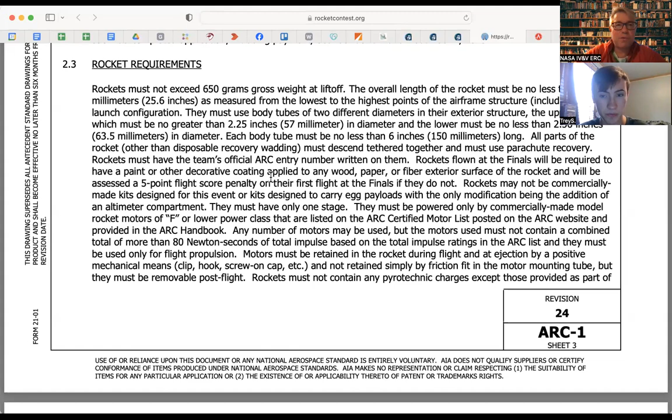So I want to begin by sharing some web pages that I've been looking at that I think are going to be helpful for the team. Can you see the page? Yeah. Okay, so always begin all of your work by writing down the requirements. So this is this year's rules for 2024. And if you scroll down, what you'll see pretty quickly after safety and how to form teams is this part right here on rocket requirements.

And so these are things that we would definitely highlight here. So we can't weigh more than 650 grams. If you're pushing that, then you're also pushing the limits of an F engine to get up to 800 feet. Okay. But this is really key here. This will affect your design. Your rocket must be no less than 650 millimeters from the lowest to highest points.

Okay. This is the next part that's really key that affects this year's challenge, and that's different each year. You have to use two body tubes with different diameters in their exterior structure. The upper must be no greater than 2.25 or 57, and the lower one must be no less than 2.5 or 63. It just so happens that these two dimensions line up very nicely with standard parts that are available from any

rocket supply company. The smaller or upper section, which we will call our payload bay in the future, is essentially a BT-70. That doesn't even refer to the diameter or anything. It's a commercially accepted name for a body tube that's 56 millimeters in diameter. And the no less than 2.5 or 63 lines up very nicely with the 65 millimeter diameter BT-80 body tube. So from now on, we're going to refer to BT-70 as our smaller diameter body tube, which will meet the requirements, and a BT-80 as the one for our booster, which will be the bottom part of our rocket.

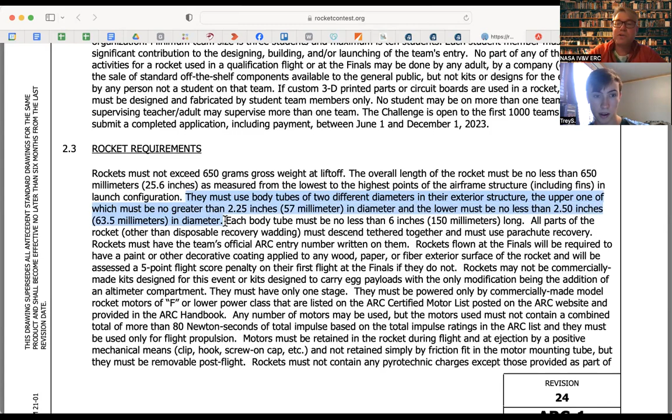Each body tube must be no less than 6 inches. So that's another thing that's going to affect us. You can't have a tiny little payload section. So you have to have at least 6 inches there. But if you have a 25-inch rocket, then that shouldn't be an issue. Just keep that in mind.

When it comes back down, all parts must come together. Now, this is one of the areas where they change it each year. Sometimes they come down as two separate pieces, which would necessitate two parachutes. This year we can have one parachute, and our booster and payload are connected together by a shock cord. There's some other details about what you're going to use here, and decorations and stuff.

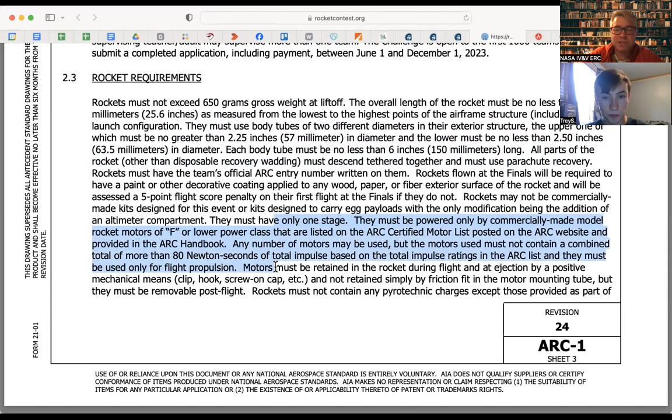And you have to use an F or lower class engine. So when you cross into G's, some G engines require a level 1 certificate, and so you have to basically stick with Fs, which is easy to do. In fact, more likely you're going to have a problem going too high, and you have to slow it down. You do have to use commercially available rocket engines, which is super easy because those are the ones that will be available for us to just purchase.

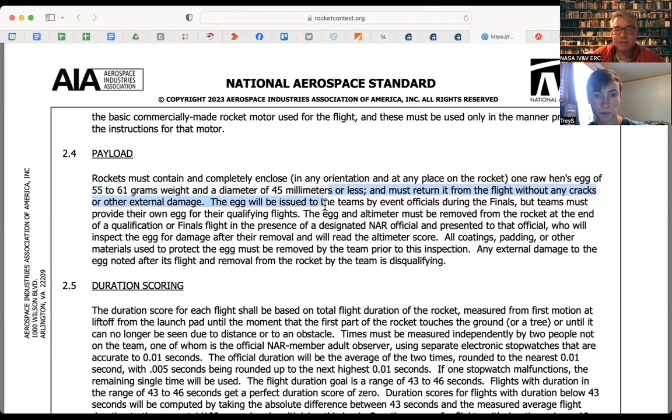So with the payload area, we're going to carry 1 egg. We've had as many as 3 eggs in the past. It says 55 to 61 grams. I usually just stick with 60. And I figure if I end up with a lighter egg, I'm going to pack it with clay anyhow. So I always have 60. So shoot for 60 and pack some clay with you. So if you need to boost it up, that gives you that consistent weight load in your payload area. Okay. And as far as diameter, you don't have a whole lot of control over that.

Duration scoring. So this is all the pretty standard stuff, but essentially you're trying to shoot up to 800 feet. So this will tell us in here where our altitude is, right? Let's see. Stopwatches. Flight duration. 43 to 46 seconds. So that's going to be key. And again, this will come into play when we look at the simulations.

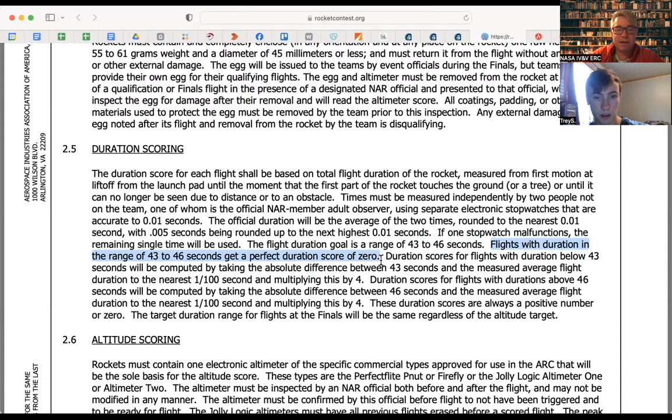Here's altitude scoring down below, and I think we're shooting for 820 feet. Is that right? Qualification 820. So we'll probably jump back to this document in a little bit to talk about the rocket, but suffice to say we need BT-70, BT-80s, and F engines. So I'm going to jump. What happens if you get under 820? You get a point added to your score for every foot you are above or below 820.

Okay. So I am not advocating this is the only place to buy parts, but I will tell you that Apogee Rockets does a fantastic job of detailing the exact dimensions of every product they sell. This is very helpful for simulation purposes. So here is a 56 millimeter TARC foam nose cone.

You are not going to gain, according to laws of physics, you're not going to actually soften the blow by using a foam nose cone than if you used, for example, a plastic polyethylene nose cone that would sort of stab into the earth. That actually dissipates force better than a foam one.

But practically speaking, these foam nose cones are pretty nice because they have an 18 millimeter hole already in them that you can stick a piece of tubing in and put your altimeter inside of it. So it's convenient if nothing else. And they're really cheap compared to other options. But we can also 3D print our nose cone. So here's a commercial nose cone, a PNC 56A BT-70.

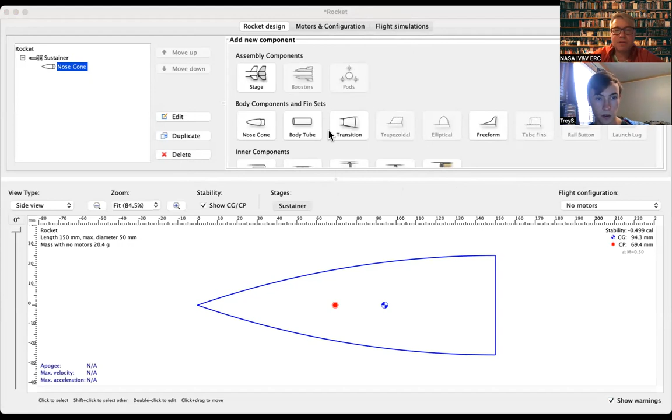I don't see that. Are you not seeing this window? Uh-uh. Oh, it pops up in a whole new window. All right. Well, thanks for letting me know that. Here's what I'm going to do. I'm going to share my whole screen, and hopefully it doesn't share our pictures of ourselves on top. So let me try again. Share entire screen. Desktop. There you go. So let me start over. Let me close that. Okay.

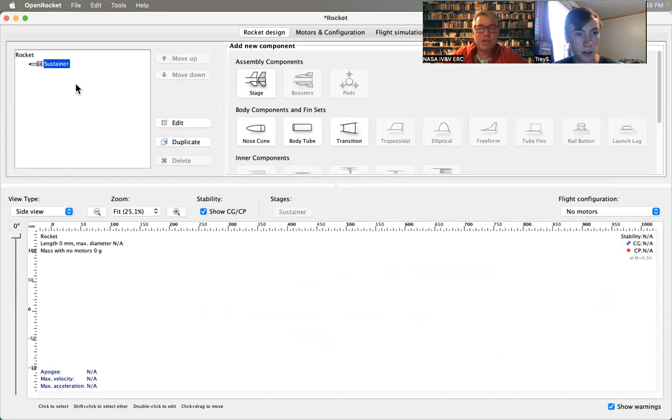So when I begin, I'm going to select a nose cone. So I'll just go in here and delete this part out for a second. We're only going to have one stage in this rocket, so don't worry about the stage button. And on this one stage, we're going to begin with a nose cone. And what I'm looking for, I can filter by typing 56 in here. And here's a LOC 2.56. And so we are looking for one that is a BT-70 size. The OPN.

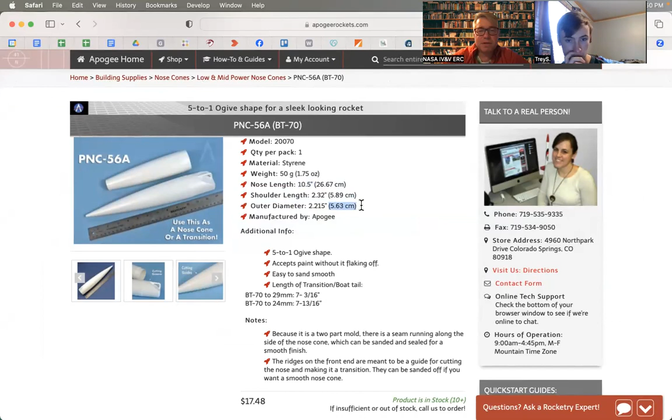I'm not sure this is the right size. 2.5, I think this is the one. Okay, and I can confirm this. I'm sharing my whole screen, so I can jump back real quick to the page I was looking at. So we are looking for one that should be 10.5 inches long. The outer diameter should be 56 millimeters. And so this one is 56. So I should be able to find the appropriate one in here.

The PNC, ogive. This looks like the right one for us. And this is 57 here. So these are some of the ones that I think we would buy. PNC 2.14, PNC. And so I can choose which one I want. So this one now, let's look at the measurements. It's 241 millimeters in length, and it has a 57 millimeter base diameter. And so 56, yeah, so this is basically the nose cone we were looking at, right?

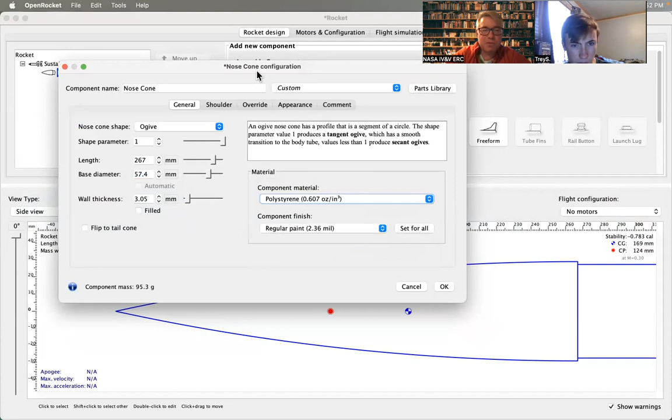And here, this is an important lesson to learn, which is what I'm doing right now, which is probably something you didn't see earlier: I'm going to ensure that when I add this nose cone to my rocket, it does match in weight and dimensions what I want. So if I go and make my own custom 3D designed one, I will do the same thing. I'll make sure that my simulation is matching what I designed. So the wall thickness is definitely not 3. I'd be surprised if it's even 1 millimeter thick.

But let's see how our mass is now. 95 grams, and it says it's going to be 50 grams. So we're still gonna drop a little bit. We're on 34 grams already. Okay, so 41, and there's another way to do this, which is there's a mass override. 48.9 grams. So if it was 1.5 millimeter wall thickness, then it would weigh in at the exact weight that it's supposed to. Right now we're unfinished, we did not paint it. Okay. And I believe this is what we call an ogive nose cone. That's the shape of it. And I think the length is correct now.

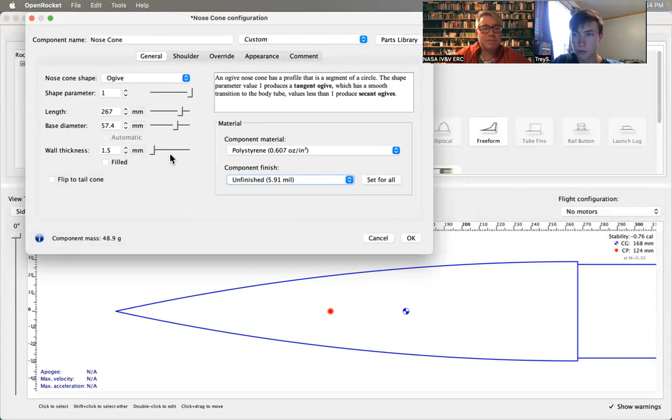It was 266.7, so 267 millimeters. The shoulder: the nose cone that you were designing didn't have a shoulder, and you need one. Otherwise, it can't slide into the body tube. So the diameter of the shoulder should be the interior diameter of the body tube. So what does that mean? Well, if we go to Apogee Rockets and we look at a BT-70 body tube, the inner diameter is 55.4. And this is 54. So that means this is smaller than the inner diameter, and that's fine. That's what they're saying the custom measurement is.

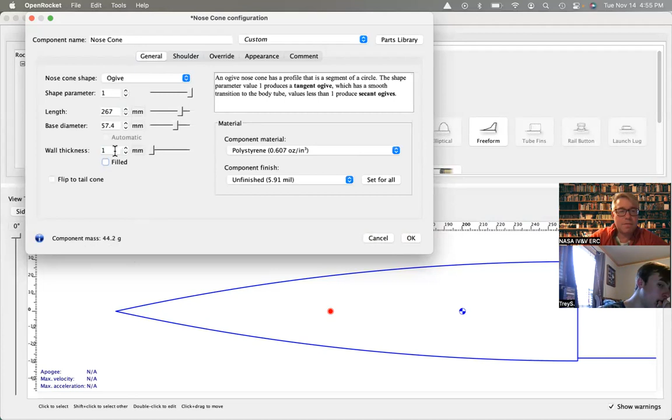And we could also look at the actual rocket nose cone that we're looking at, the shoulder length, the outer diameter. I'm not sure it shows me shoulder diameter, but it's going to slide into a BT-70 body tube. So this is weird. It says 0 thickness in the walls, and I'm going to say it's at least, we said 1.5 for the other one. Yeah. Okay. So now we've gained some mass here. I'm going to say it's all 1 millimeter. General. 44. So I think we're getting pretty close to what it is.

Okay, so it says 54 grams. So we're there. So this nose cone works. And we are hoping that this is the PNC 56A BT-70 nose cone. That's the one that we're hoping that we're buying, and we're going to use it here.

So I'm going to go ahead and rename the part. And we have it. So if you see, we now have the beginnings of our rocket. Over here in the list of parts, I'm going to click on the nose cone because I'm going to click on what I want to build off of. So if I want to add a tube or a fin, I first click on the body tube I want to put that fin on. Otherwise it can create a part that's not attached to where you think it is.

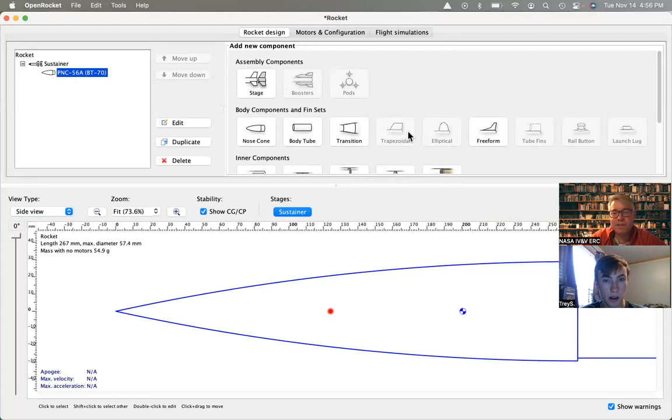So attaching to that, I now have options for, I can't do fins and stuff yet, but I can do a body tube. And in here, Estes makes the basic BT-70 body tube. It should be 18 inches long. Let's see, Estes BT-70. So this is the part right here you want. I think this is the part you used in your rocket as well.

Okay. It's showing as fantastically short for some reason, but we want to make sure this is at least 6 inches long, right? That's what the directions say. So you said it can't be less than, no, 25? Not less than 100 millimeters. Yeah, so it can't be less than 150 millimeters long. So you can see it forming down here, right? So now we're getting a payload bay, but let's just start by making it quite a bit longer.

But for the whole length of the rocket, it can't be less than 25. The whole rocket length, yeah. But I'm just gauging this right now. I'm just gonna make up a number right here, and we can play with this later. Let's just make this 250 millimeters. It said it had to be at least 150, so that's cool. So it says right here that it's 56.3 millimeters outer, 0.533. Again, these are like less than a millimeter thick walls. They're paper, spiral kraft paper.

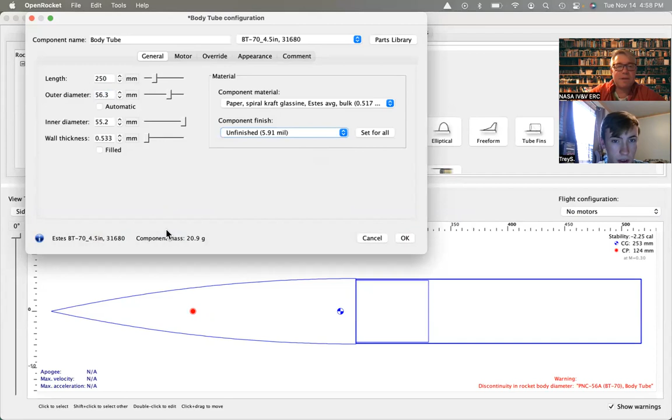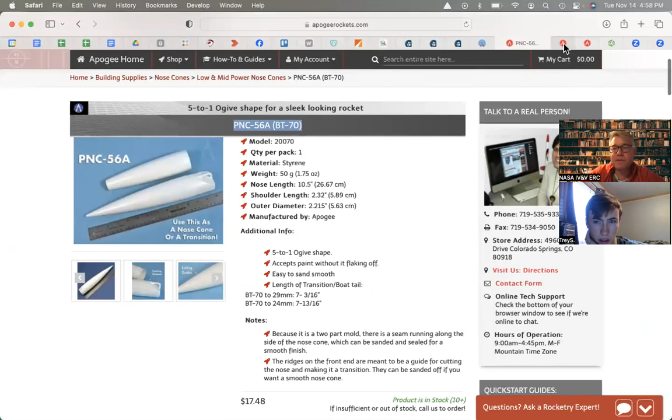Okay, I'm unfinished right now. It's telling me that it thinks it's going to weigh 20.9 grams. That seems consistent with what I would expect. You know, there's a nose, there's a body tube. The entire thing weighs 36 grams, and I just cut it down quite a bit because normally this comes in an 18-inch length. So I'm going to stick with that and say okay. So now we're starting to look a little bit more like a rocket.

Okay, the next piece is going to be a transition. And the transition piece is going to go from BT-70 to BT-80. Now it's a trick to try and begin with commercial parts if you can. Okay, so here's a 70 to 80 right here. And if I use that, what's it made out of? Conical. It's made out of balsa wood. It'll just give me some measurements. It'll be helpful for me.

I could find one that is a 70 to 80 made out of something besides balsa wood, I guess. But it's gonna be useful for me to get this going and started. So we'll start with this as an example. Okay, so it's showing me this. Now, what I'm gonna do in here, I'm gonna make this out of 3D. I'm gonna print this. Okay.

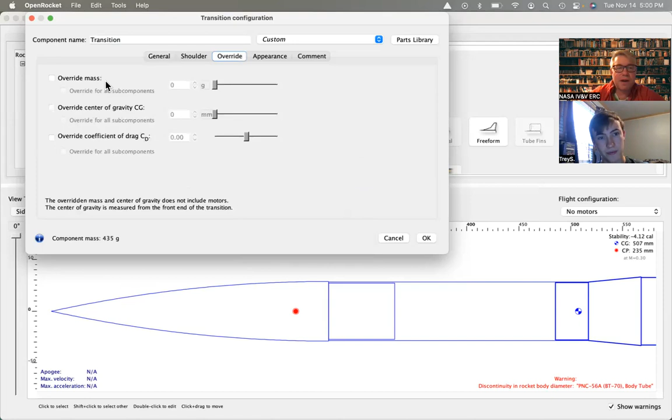So my material, and I've done some testing as well, the closest density I found in the software to PLA and ABS plastic is actually polycarbonate Lexan. So when I do 3D parts, that's what I usually use as my simulation density. I didn't show you this, but there's always an override. You can always override the mass if you got the dimensions all right but the mass is coming up wrong.

Okay. So this shows that it's going to slide into the upper payload bay here. And it shows you that that shoulder, the fore shoulder, upper shoulder, is 31.8 millimeters. In case you want to convert that to American, that's 1.25 inches. Okay. And the bottom one, this is the one that's going to slide into our booster. It says it's the same, right?

And 1.62. Yeah, so I might actually make that 2 inches, which back in millimeters is 50. Okay. So that's cool. 50 there. And this one we're going to glue in. So it won't really matter, but it's not as critical for a part that I'm going to glue in to have enough to slide together and be stable as one that's going to be sliding apart. So I'll make that lower, the aft shoulder, a little bit bigger, longer.

In general, okay, it has a certain length, it has a certain diameter. Okay, now here's the wall thickness. They're saying it's balsa, so it's totally full. We're going to say no, the wall thickness, and this is my advice on parts. When you're 3D printing, 2 millimeters is a good 3D printed thickness for nose cones and certain parts of the rocket like transitions. Technically, I'll show you how we can make this transition in a way where the bottom is thicker, because you will blow out the bottom with the forces of the ejection. I've broken rockets at the bulkhead. We're going to build the bulkhead into this, but you'll see how that works.

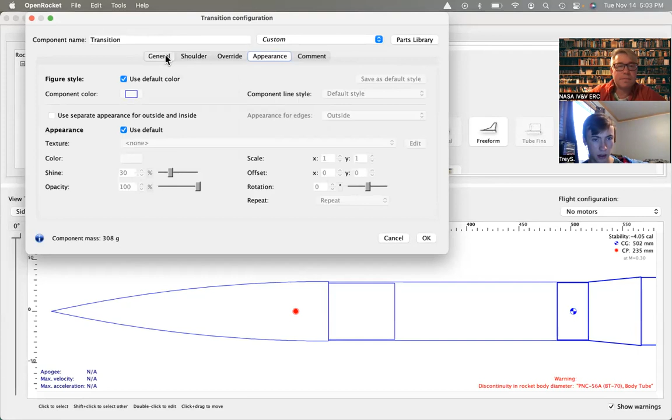Okay. So it's 2 millimeters thick. It's saying it's about 308 grams. That doesn't sound right. I think that's because it hasn't figured out that it's hollow yet. 308 grams sounds like a lot to me. Are we overriding the mass? No, we're not. Yeah, I can't really believe it's 300. Is it because it's 50 millimeters long? So you think that's too long? I don't know. Well, no. Maybe, I don't know. Let's leave it for now, but that sounds too heavy for me.

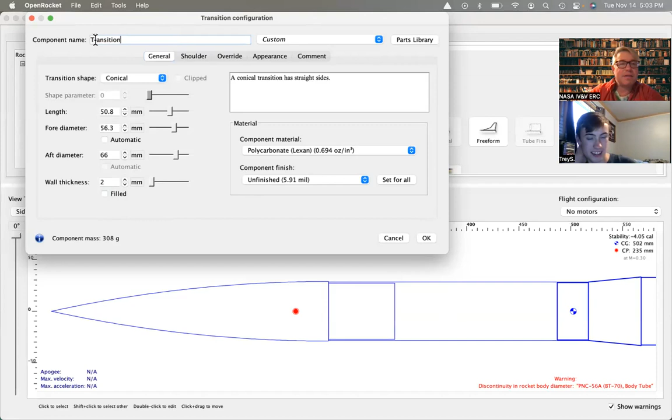And I'm gonna call this my 3D printed transition. And I didn't even add the bulkhead yet, so the 308 grams isn't even counting the bulkhead. But we'll see. Okay, so we have that part. Now the bulkhead will be printed into it. I don't want to jump too far ahead, but let me just show you something that I think will be interesting. Here is my Onshape parts. And here is a part that I built that I can share with folks if you want to look at it. This is a 70 to 80 transition I made for another class that I was teaching.

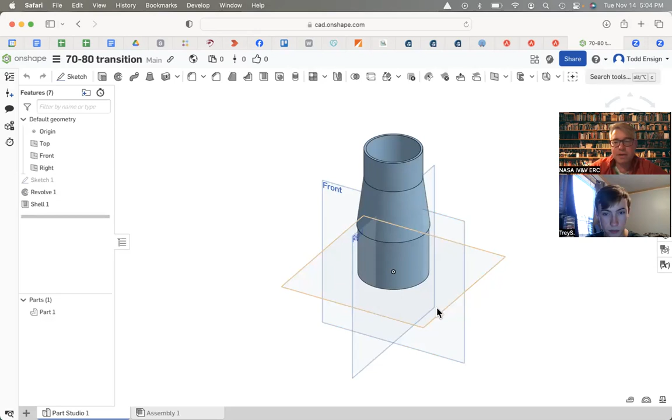And so what I can do with this, if you look, the bottom's solid. Okay. The top, though, is hollow. Shelled out. Yeah. And so what I did, I made this through what's called a revolve. And by doing a revolve, it allows me to make a thicker bottom bulkhead. So if it was only 2 millimeters thick, I think you'd crack it. I would say at least 3 millimeters thick for that. You can go even thicker if you want, but I'll show you how we do that. I'm not sure how to make the nose cone either in Onshape. I've used it before, but... Yeah, I'm also going to use a revolve for that. So I'll show you how to do that.

Okay, so now we have a transition. It's already highlighted, but if it wasn't, I'd highlight that, and then I'm going to add body tube. And I'm going to do a BT80. So here's a BT80 from Estes. And I'm not sure what the difference any of these are, to be honest. This is a Fat Boy. This is an 8-inch BT80. Here's a slotted one, so it has slots for the fins, but I'm just going to buy a standard BT80 body tube for now. Okay. And for whatever I'm selecting, it seems to be coming out short. But most of these are a lot longer. Like I said, their standard is like 18 inches.

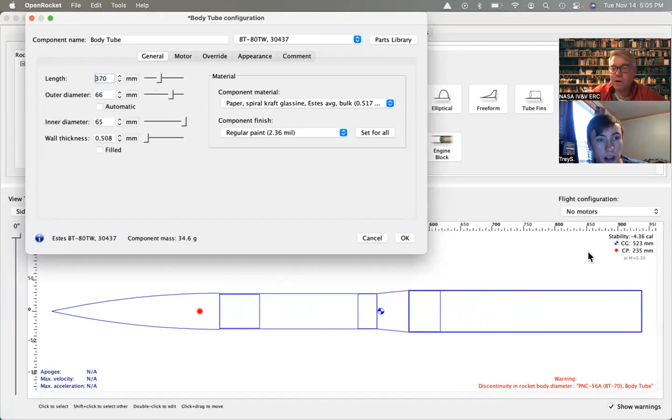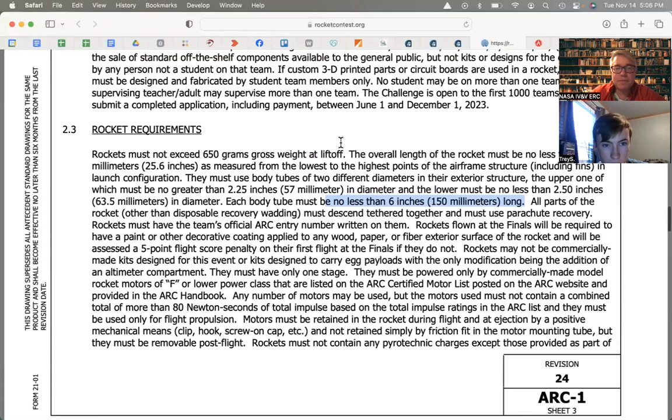Now, what I'm able to see at this point, I can see the rocket length over here, 938 millimeters already. The requirement for the rocket was that it must be no less than 650 millimeters. So I'm well past that, right? Right. No problem. And that looks kind of balanced to me. I don't know, I'm just kind of making that number. Well, let's say 370. That look okay? Yeah, that looks good. Okay.

Just checking the mass here, 34.6 grams sounds right. So I still have a question about that coupler, but otherwise this sounds fine to me. It's unfinished, it's kraft paper, perfect.

Now click on this body tube, and we're gonna say inner tube. And this is another thing that I wanted you to correct on yours, but I'm not even gonna choose from a part here. So I'm gonna make my own. I'm gonna 3D print an engine tube. Okay, so again, I'm gonna use polycarbonate as my material relative to the bottom of the parent component.

I would suggest you always choose one relative position. Otherwise, you're sliding parts around and it gets weird. You slide the slider and they start moving the opposite direction because it's relative to the nose or relative to the bottom. So if you're always relative to the bottom, then it's easier for you to keep track of what's going on.

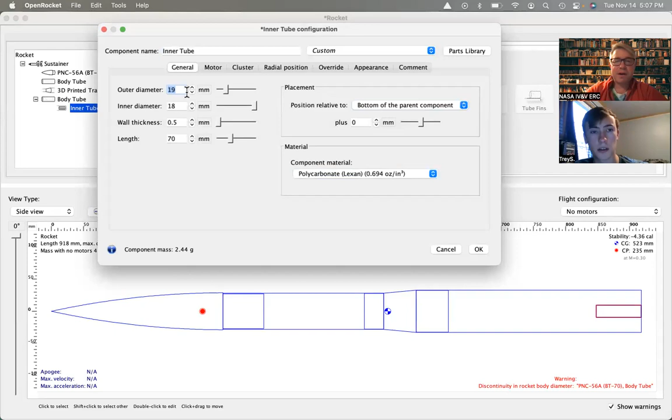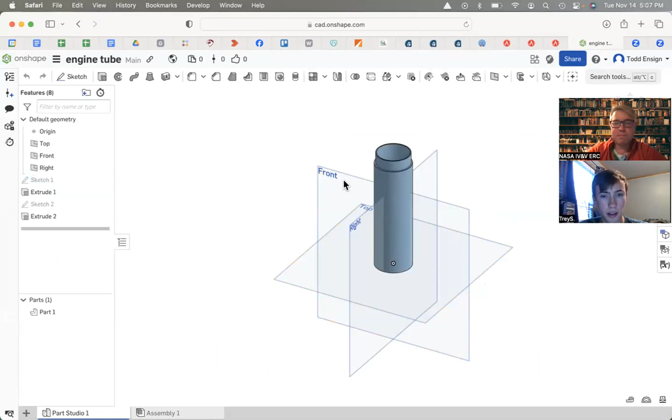Now, I know what this part has to be. I'm making an engine tube that is intentionally meant for an F engine. So I'm going to go ahead and go back to Onshape. It's 29 millimeters, isn't it? Right. So here I'm going to show you an engine tube. So here's my engine tube. Okay, and what's important to know about this engine tube is the diameters, right? So I have an inner diameter of slightly more than 29.

So if I go to my sketch, let's see, what did I do here? So you can see my measurements now, right? Okay. 29.1 I gave it. I gave me a little extra room. There's like a sticker on the outside of your engine and stuff. And if you're exactly 29, you might have trouble getting that engine in there.

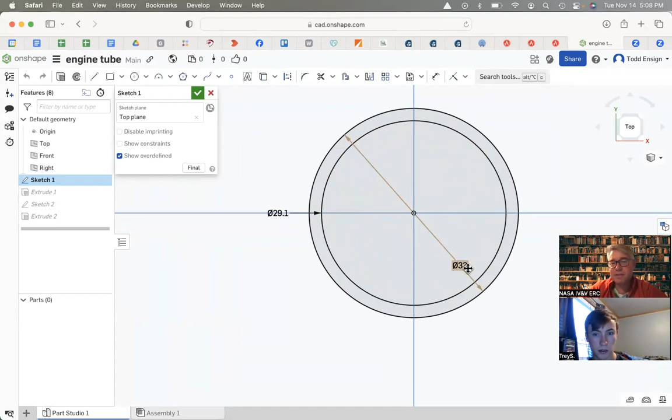Okay. And what I want to do is make the thickness of the walls. I told you earlier, 2 millimeters for most of my things. And when I'm doing structural parts that are going to get forces, I make them 3 millimeters often. This is just my advice. You can do whatever you want and experiment. But 29 plus 2 millimeters on this side and 2 millimeters on this side comes out to 33, basically.

Okay. Right? So yep. I know this, and also, how long is this puppy? It depends. The different motors are different lengths. Right, but so how long should I make my engine tube? And I can look in here, I made mine 100 millimeters long, okay?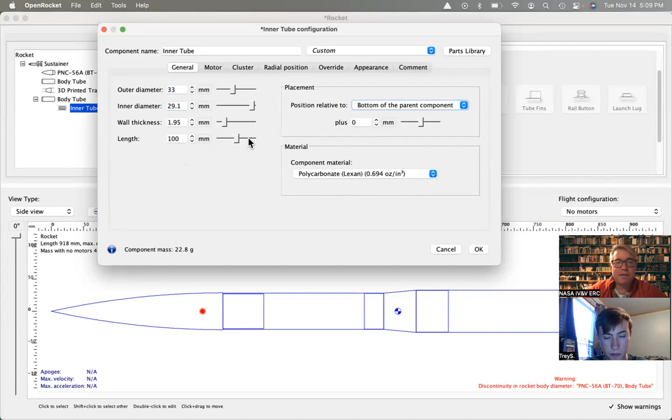I'm showing these dimensions because as we go into OpenRocket, we're gonna say the outer diameter is 33 millimeters. The inner diameter is 29.1 millimeters. It calculates my wall thickness for me right there. See that? My length is 100 millimeters. My material is polycarbonate, okay? Now, I want it to slide out of my engine, my rocket.

Another thing that I would recommend for you, again, based on my prior experience, is you want this thing sticking out of your body tube by a little bit. Like I usually say like a half inch. Okay. Just so if it sticks out approximately 12.7 millimeters or something like that, that's pretty cool. That'd be my advice to you.

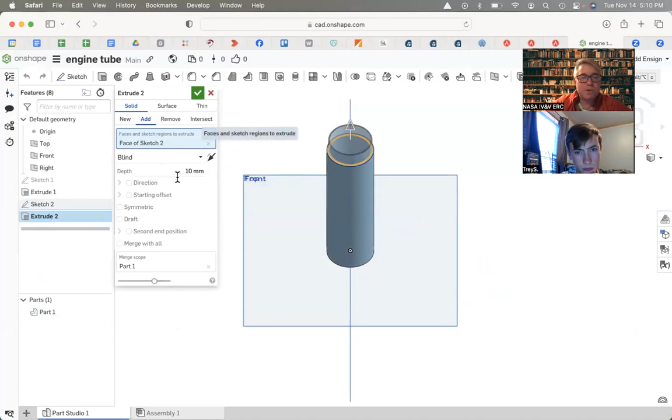I think I actually made my part a little more sophisticated. We added a little tab on here in the second extrude. And that second extrude was another 10 millimeters. But what that allows us is it's a thinner cutback version where we glue on a retainer ring. And I can probably show you that retainer ring in Apogee Rockets in a bit. But anyway, so that means it's sticking out 12.7 millimeters. So actually my retainer ring is going to cover that.

So I'm actually going to make my length 110. Okay, it sticks out a half inch. That's good. So I have this. It's saying 25 grams. That still seems a little heavy, but that's probably okay. We can validate all this stuff using a balance once we've printed the parts out.

Now, what's going to hold that engine tube in place? I click. Oh, I should have named it. This is my 29 millimeter engine tube. And that's important because when we go to choose what tube we put an engine in, we have to choose that tube. Okay, so I click on that. Now I look and I should have an option for centering rings.

Okay, I'm gonna cancel the manufactured ones and make my own. The button that says automatically calculate is your best friend ever. It's wonderful. Okay, so relative to the bottom of the parent, I'm gonna slide this ring up. I'm gonna put the one right in the very bottom of my rocket, right there on the bottom. I can get it. Okay. No, wrong way. Good. It's not made out of cardboard. It's going to be one that I 3D print. So I'm going to go with polycarb.

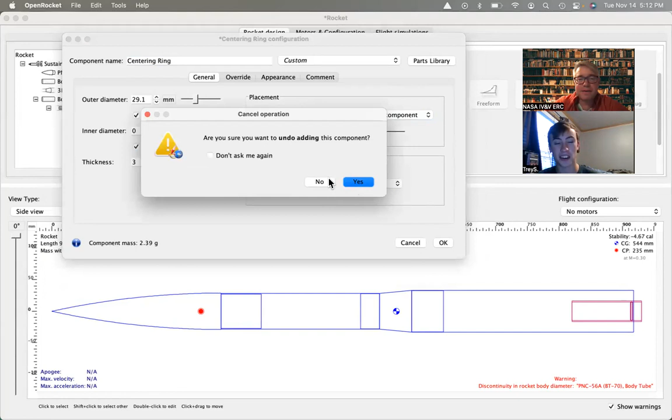It's putting my centering ring inside my engine tube. Yeah, that's what I was actually confused about. I thought it's like a little ring that goes around your body tube. Yeah, so I should have clicked here, and actually I should rename that my booster.

Okay, so I click on the booster, and then I add my centering ring. And you can see it now, it's going all to the insides of there, but it's also going to do a ring in the middle that's automatically calculated for the engine tube. So I'll make this 3 millimeters thick. It automatically calculates the outer diameter as the inner diameter of the body tube. These are exact measurements now.

Exactly what the inside is, you'll do the exact measurement for things that are press fit. These are tight fit things. I want my engine to slide in and out of the engine tube, but I want my other parts to all fit really tight.

What holds the engine inside the engine tube? A retainer ring, and I'll show you that. There's a lip on the engine itself, a thrust ring built in, that keeps it from going through the rocket. And when it ejects, there's a retainer ring that'll keep it on, or duct tape. Duct tape's fine, by the way. Works great. Have you used duct tape before? Many times.

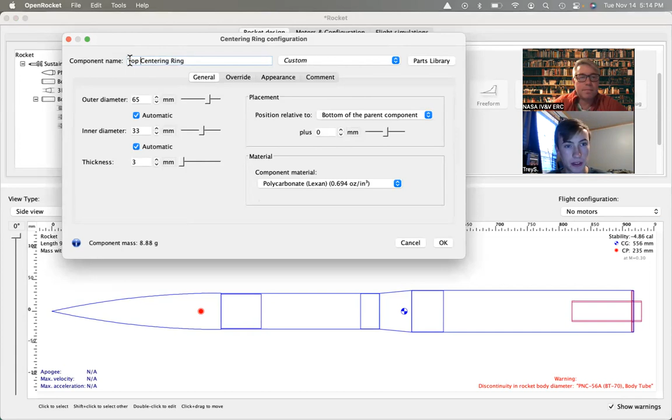Okay, so this shows its relative position is 0, which is exactly what I wanted. Hit OK. Now I'm going to cheat. I'm going to go over here, click on that part, right click on it, and say duplicate that part. And I'm going to call this one up here my top. Come on. Top centering ring, and I'm going to slide it up.

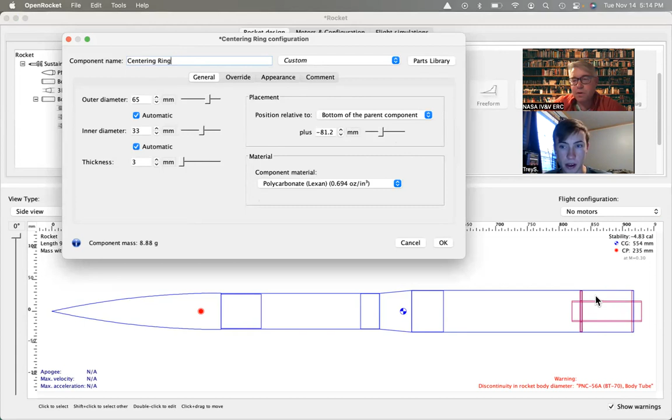Now, I don't usually put it on the very top here, but somewhere in this general area. You could put it at the very top of that tube, but this is kind of cool because it gives you a little bit of extra space for more glue. It does limit the size of your fin tabs, though. And so you can actually drive the length of this by where you want to put your fin tabs.

Now, this one says it's only 8 grams. That sounds right to me. The other one says 8. Okay, so the other one's good. This is my bottom. So now I have 2 centering rings, so now I can hold my engine tube in place. I can come back to your question about how to hold it in.

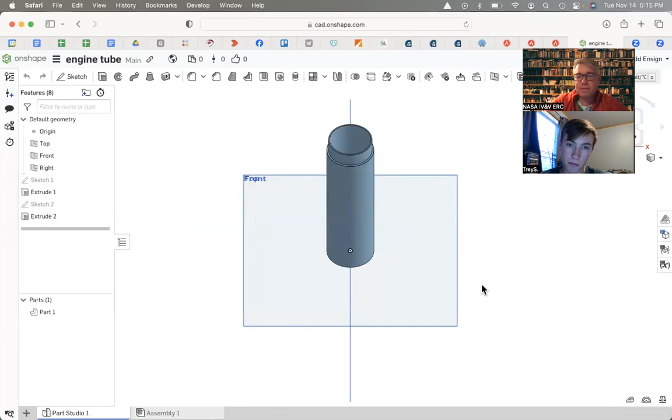There's a part we'll glue on, and we glue it right onto this little lip that I intentionally made on my engine tube. Can you add threads to that little lip and then make a piece that threads on there? You could, but for a few dollars, I buy that piece. Okay, because I have a little Model B rocket, and it has like a little plastic thing.

Okay, we're gonna go there. We'll go ahead. I'd like to. It annoys me when I'm listening to a talk and we don't answer the questions.

So let me just duplicate this tab. So we're still in their shopping area. I go to shop, I go to building supplies. And we're looking for a retaining ring. Centering rings, bulkhead. There's a bulkhead that stops the thrust of the ejection charge. Rail guide buttons.

Payload bay, shock cord. I want a retaining ring. It might be in miscellaneous hardware. I'll just search for it because I don't really know where he's got it.

Right here. See this? Yep, that's it. 24 millimeter. I want the 29 millimeter version of this. So that glues right on, and it has the threads there, and that part threads right onto it. Yes, you can 3D print it, but part of what I'm trying to do is show how with only a few clicks I can 3D print the parts that I need.

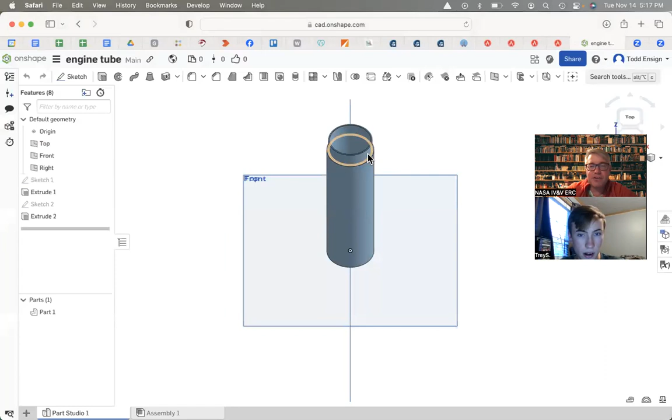Compare some other 24 millimeter things. Well, at least here they are, down the bottom down here. Here's 29. That's the one that I want. So I'd recommend you buy this. And it's meant to glue onto a paper tube, which you saw has less than 1 millimeter thickness walls. So by designing my engine tube with that little thinner end there to it, that gives me the place to glue that right on there. And it works great.

It really works fantastic. All right, so now we're not done with building our rocket because it needs to have some fins. So I click on the booster because that's where the fins are going to go. I want to say trapezoidal fins. Okay, so these look kind of like the fins you had, but from real world experience, I'll tell you that if they stick out below your rocket, they're going to crack off. So I can play with these different dimensions here to get my fin in a better place.

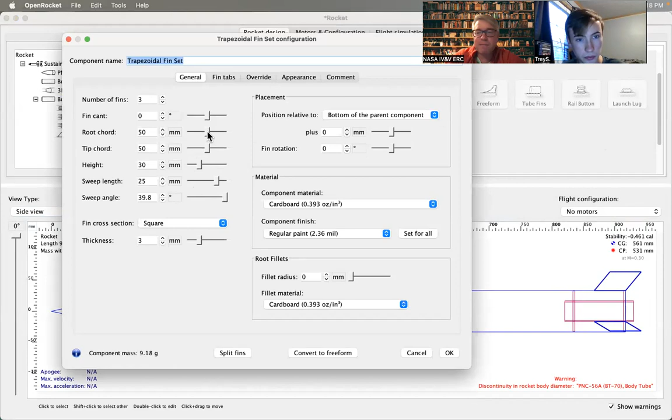So first, the root chord is the bottom part touching the rocket body. So by sliding that up, I can make it a bigger fin. I can change its height, which is how far it is from the body tube with this. Okay, so that's kind of a cool looking fin so far. I'm not objecting to that. Okay, the sweep length is the front angle. That looks kind of cool. No problems. I got no problems with that.

You can do it. I don't know. Do you like this better? Or do you like this better? I like that better. This one? Yeah. So we're going to say that. Now, we're going to have 4 fins, because my thought is that's going to make you more stable. It's also going to give you some drag.

If we don't go high enough, you can always drop a fin. It'll cut back. You can't really go more than 4 though, or you won't get on the launch rail. If you have 5 or 6 fins, you can do that, but then you're going to have like a long tail guy that sticks out past the fins. It's going to be really awkward. So don't do that.

Now, what I want to do next is define some more parts about this. It's not made of cardboard. You had yours as cardboard. So I'm going to make this out of wood. I actually prefer wood. And I have some birch and I have some other sort of wood that I have. I have balsa as well. But the birch is really strong. I have it in a variety of thicknesses and I can laser cut it right out.

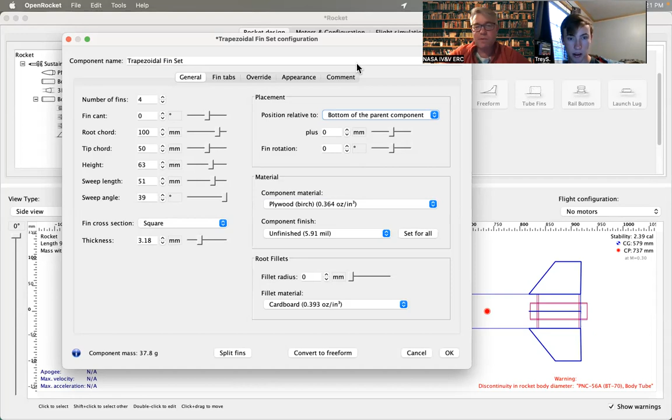I prefer wood fins. You can definitely 3D print fins though, and I've done it before. We've done really cool airfoiled fins and stuff. I've done through the wall fins. But for simplicity, let's just say we're going to do some wooden fins. I believe deeply that you should do through the wall fin design. Okay.

A through-the-wall fin is going to extend all the way down to your engine tube, and it's going to press against your centering rings too. It gives you all this contact in here. And if you put some Gorilla Glue, which expands like that foam, when you glue it in there, it's going to be locked in there like it'll never break off ever. Like your entire rocket will shred and this thing will still be perfectly fine.

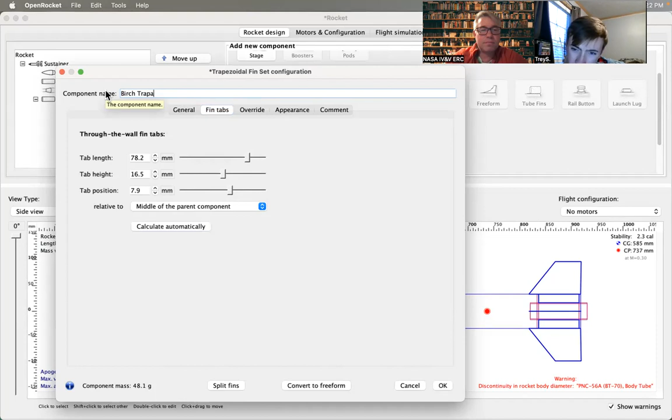So I'm going to use the automatic button to calculate these, and you see what it just did? It automatically extended them down to the engine tube and from ring to ring. That is awesome. So that's what I want. It's saying they're 48 grams. That's perfect. I love it. It looks good to me. And I'm going to call these, they were birch, right? Yeah. So how do those work, really? So it goes through your tube, and then I'm going to show you.

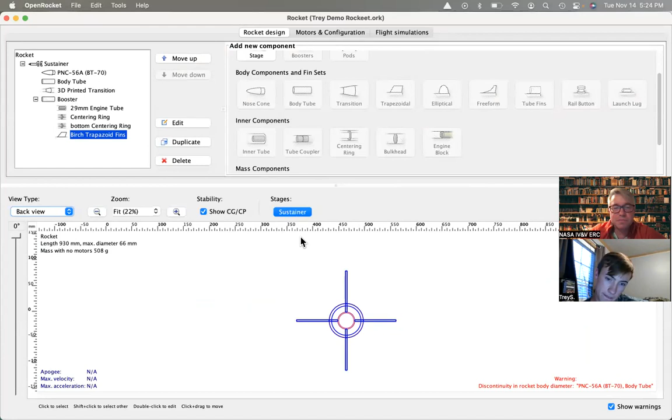And then what'll happen is if you look at OpenRocket here, I'm gonna do a quick save and call this. Okay, if I look at the back, can you see how that tab extends through the body and touches the engine tube? We have to create slots in the centering ring to fit? Nope, nope, nope. It just glues against them. Okay. More surface for the fin to glue to. Okay, now this rocket is kind of viable. It has a center of gravity and a center of pressure. So that's pretty cool. You remember those from our previous talk.

If I want to add that ring in the bottom, that little retainer ring, it does weigh something. It weighs 13 grams. So what I can do is I can click on the actual engine tube. I can drag these down too if I feel like it, just to make it make more sense in my head. The fins are up here or whatever. It doesn't, but I can click on that and I can add a mass component. And I can call this the retainer.

And it was 13 grams, right? Yeah, I think it was 13.3, but from the top, I'm going to say from the bottom. So we'll put a little glue on there. So we'll call it 14 grams. Okay. And what I'm going to do is I'm going to slide that thing down to the, it's literally sitting right there. Okay. That's my retainer ring. And I can also change its appearance if I want, default colors and stuff like this.

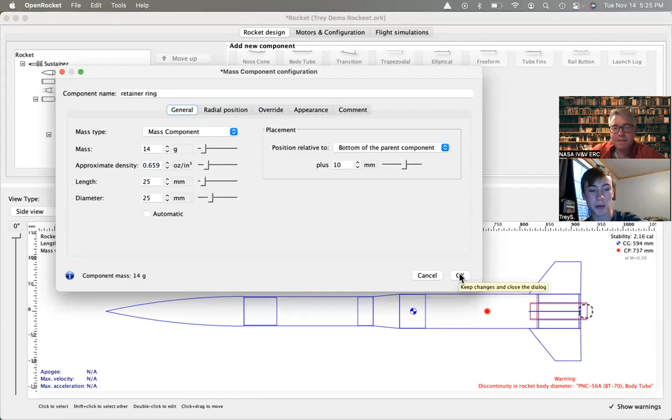Do you like to add colors eventually? If I'm doing a class and I'm trying to show something specific, I sometimes add wood grain or colors, but it's fine. Is it important? No. Is it a good way to come up with a design for your rocket? Like a color scheme kind of? No, it's not. It's just bling. Yeah, okay. It just gives you a 3D finished look. So this is paper, but I could define this part is red and this part is blue, so there's no scientific reason to do it. It just looks cool. Which is nothing wrong with that.

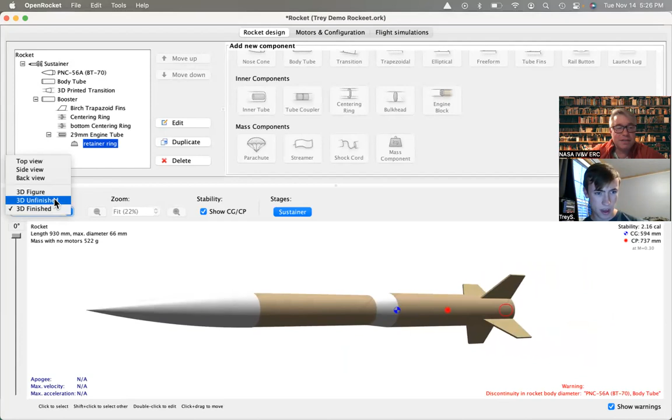Let's just say you're going for fundraising and you want to show an example of your rocket. Tell me this isn't like a cool looking thing, right? Yeah, that does look cool. And I actually like this view. The 3D figure is kind of cool because you can see inside the rocket and see all the pieces. Like we found a sponsor and they'll probably like to look at this. Yeah, this will be very helpful for getting support.

Okay, I did forget the bulkhead. So up on our transition up here, we're going to add a bulkhead, and I'll skip that. We'll let it do the automatic. I'm going to make it 3 millimeters thick. I'm going to say from the bottom of the parent part, and if you can see, it's showing up right in the middle of this here, and it should be down here. So I need to slide that down to there. That's where I want my bulkhead, right at the bottom of this coupler.

So when the gases, you can't see right now, but when the gases push out, it'll separate here. Okay. So everything from that bulkhead up will eject, and your shock cord will be tied to that. Okay, and it's going to be actually made. Do you really need a bulkhead right here then? Yes, have to have a bulkhead. You can choose to put it up here or down here. It's much easier down here because you can tie things to it much more easily and stuff.

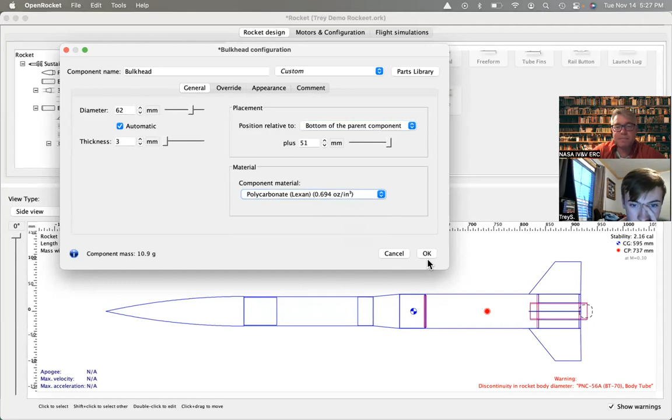Okay, it says it's 10 grams. I think that's legit. Okay, so our rocket now, you can see, is starting to get a little closer. We have a stability of 2.16, but 2.16 doesn't have any engines in it, doesn't have any payloads in it. So again, we're getting closer. I'm going to go up to the nose cone, and I'm going to create something to hold my altimeter up there. So the altimeter that we're going to use is the Jolly Logic, right? Yeah. So let's see here.

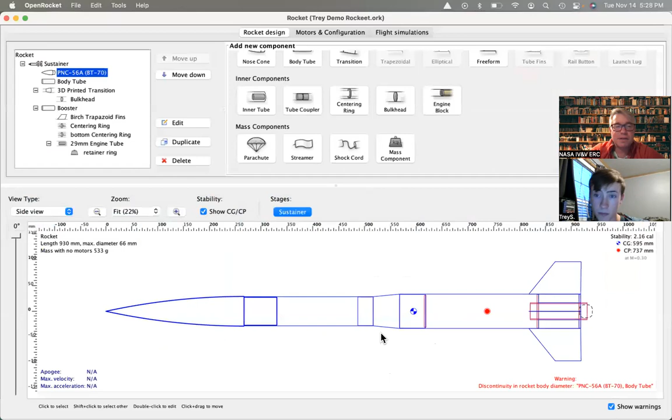If we go and search for Jolly Logic, that's the guy right there. And this thing weighs 10.2 grams, but you can't just shove it in there. You have to have something holding it in place, right? So up in here, I'm going to go in and add, let's see, a mass component. I could add a mass component. What kind of mass component? It's going to be an altimeter.

And it was 10.2 grams, but I'm going to go ahead and I can keep adding, like I can add a separate part and call that my mount for it. But let's just go ahead and make it 25 grams because I'm going to make something to hold it. It can be made out of foam, paper, plastic. You could 3D print, but we need something to hold that sucker in there. Okay, and this is our Jolly Logic altimeter.

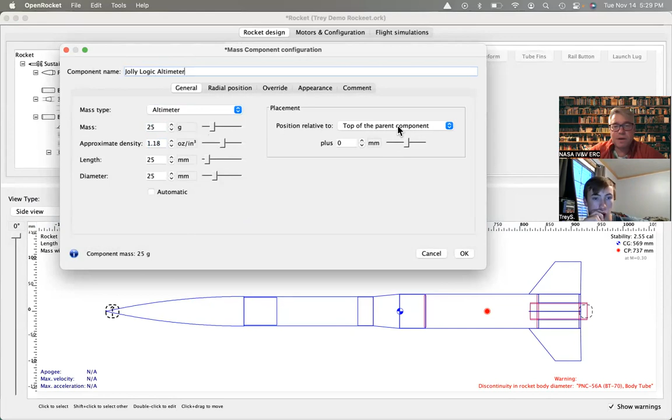Okay, and we are going to say everything from the bottom of the parent component. And right now it has it riding on the nose cone up there. So I'm gonna say, nah, it's probably like here. And I'm gonna make holes in my nose cone to allow for equalization of pressure. So you have to have 3 or 4 equally spaced holes that are identical, and they're probably about 1/4 inch holes, like little tiny holes with a drill bit. And that allows the air flow to go in and out, and that gives you the ability to read.

So I'm going to say 10 point, was it 2 grams? Yeah, somewhere around there. Add some more for a foam mount. Okay. Now in here in the middle, we're going to do our egg. Okay, so I'm going to click on that part of the tube. I'm going to add a mass object. Call this Humpty Dumpty. Now it should weigh 60 grams, right? And so I could just say 60 grams, and that's Humpty Dumpty. And from the bottom of the component, I'll put Humpty Dumpty right in the middle.

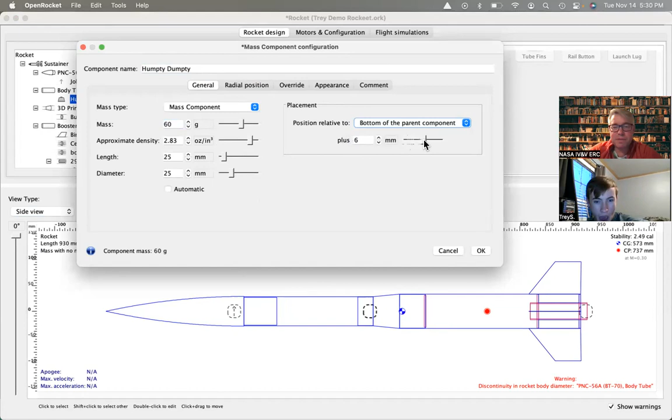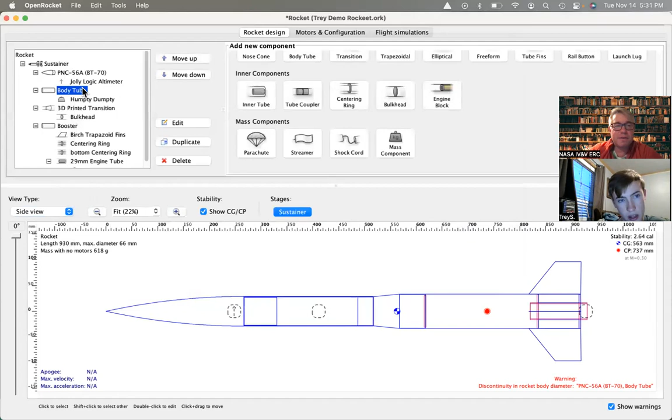Well, this is actually all payload down here too. All this space exists down there. And I assume we are going to tape the nose cone on so that we'll pop it out there and pull the egg out here. So we do have to figure out, we could fill that space with something, just some foam, however you want to do it. But let's put the egg right in the middle here for now. Okay, let's go ahead and also add another, let's see, I'm going to call this one the payload bay.

We're going to add another mass object, and this is going to be our egg holder. So in Apogee Components, you can find a variety of foam egg holders, egg foam, and they have protectors. So here is a single egg foam for a 2.6 horizontal, that's sideways. So is that what we want? 2 point, is that too big for us? Yes. We don't want a horizontal, we have to hold our egg vertical. I think this is for a BT80, right?

Outer 2.63, so we're talking about 65 millimeter. Yeah, so this is the wrong size, but this is the basic idea. You can shop around so you can find one that holds it vertical. I don't want to waste your time, but it's cheap. It's a rock solid thing. You put some string around it so you push it in easy, but you can pull it out with the string.

Wait, can we 3D print something like that? Yeah, but you don't want to 3D print something that's gonna softly hold your egg. Okay. What if it was like a tight fit on the egg? You want to make it out of foam. So just find some foam that someone packed anything in, not styrofoam, but softer foam that someone got when they got a new computer or a new TV. Find some of that foam and carve it out, or buy one of these things.

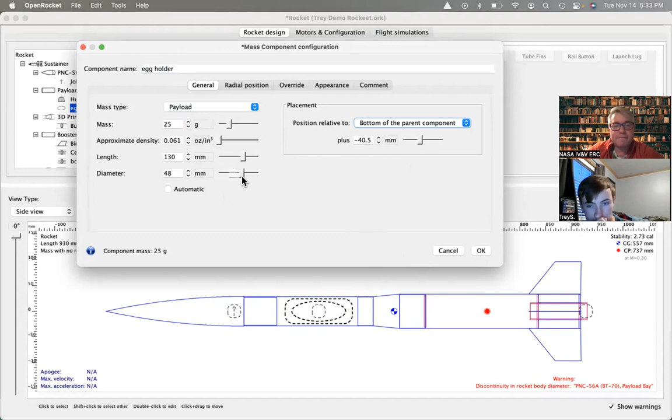That looks neat, doesn't it? Yeah. But I defined its mass already. So now I have an egg, and I have an egg holder. I have an altimeter, and you can see my center of gravity is climbing up here. That's fine because we're not done. I'm going to click on the booster tube, and we're going to add a parachute this time. Okay, and I am going to buy a parachute.

You can make your own, but I'm going to go for diameter. I'm going to start by diameter, and we're in millimeters. Okay. Alexa, how many millimeters is 18 inches? 457. So this is an 18, oh, here it is. It says right here, 18-inch parachute. So here is an 18-inch nylon conical parachute.

And here, LOC Precision is one that I've used before, and I know I can buy one of those. So I'm going to choose the LP18. This one is a nylon chute, 8 lines. It has a mass already figured out for you. It knows the material. It knows that it's going to deploy when the ejection charge goes. Relative to the bottom of the component, just because I'm being consistent, so I know how my part moves around. And it shows that it's in the middle of my transition part right now, so I need to slide that sucker down.

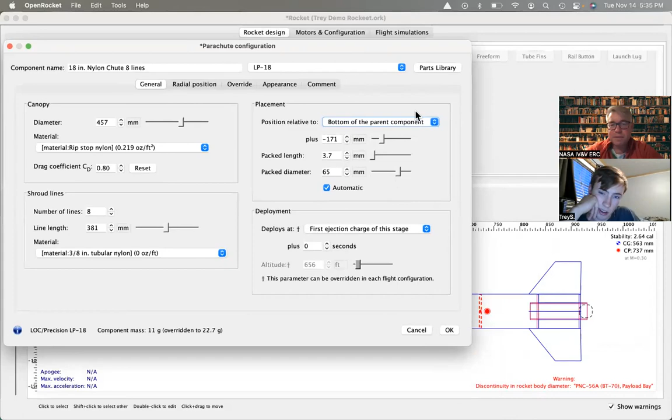Okay, and just for giggles, I can change the way it looks. Yours looked kind of funny. Yeah, I wasn't sure how to, because I didn't have the size or anything. Yeah, so it's going to be packed up to the top here. We're going to have recovery wadding or dog barf down here close to the engine, protecting our parachute, and then we're going to have our parachute here. But when it's packed, it's going to probably take up a little bit of space. So it's going to look like that, approximately. Okay, and that's fine by me.

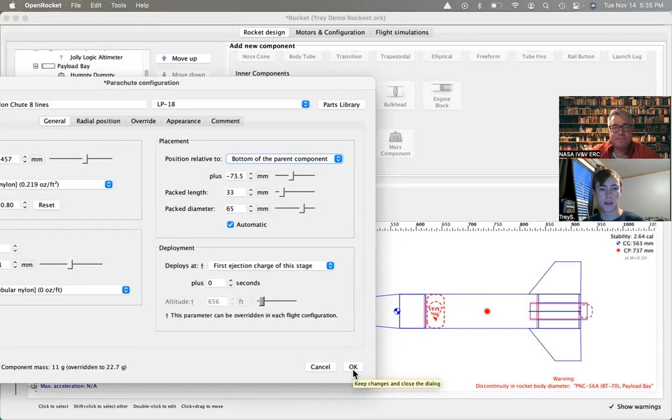We are going to go in our booster and we're going to add, let's see, just a general mass component. We're going to call this our dog barf. This is an insulation that you can buy. You can buy a giant bag of it. I recommend you buy one bag. It's like $20 and you'll have recovery wadding for the next 10 years. Perfect. So it's actually called dog barf? No, it's recycled newspaper, fire retardant insulation that you can buy at Lowe's or Home Depot.

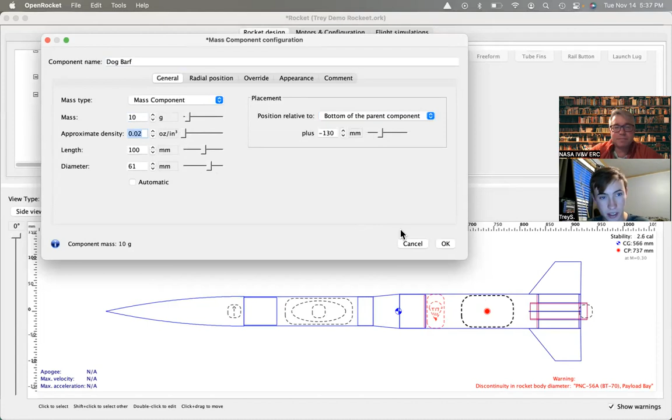Okay, and I'm going to use the bottom of the component, and I'm gonna slide that stuff down in here, and just for fun, I'm gonna fill the space up. This is just visual, but it's taking up this much space. I'm gonna put a lot of it down there. Right. We don't want our parachute burning up. Yeah, and 15 grams, that's probably a lot. I may be overestimating that. Maybe it's only 10 grams of it. Okay, now we're getting closer.

Okay, we have a rocket. We're missing a shock cord. You did put a shock cord on yours. Congratulations. So I'm gonna put a shock cord in. I'm not gonna use elastic. I'm gonna use Kevlar. I'm not sure which thickness it is, but let's go with the 12 strand stuff. Now the length in theory should be 3 times the length of your body tube. So our body tube was 400 millimeters. So we would want quite a bit. Let's say 1,000.

We want a long shock cord. The longer the shock cord, the less likely you are to wreck your rocket. Okay, and relative to the bottom, I want to slide that thing down. There's some shock cord, and it's kind of centered between the bulkhead and our engine mount. We're going to actually attach it to the engine mount when we build the rocket.

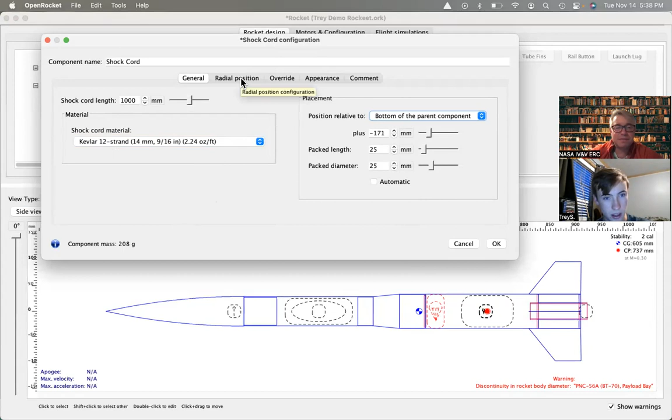Okay, and it says it weighs 208 grams. Well, that is totally wrong. It can't weigh 208 grams. An egg weighs 60 grams. This little bit of string probably weighs like 3 grams. So I don't know why it's saying that it's going to weigh that much. There's something wrong with this. And this is why you always have to, don't trust, verify.

I'm going to override the mass. Okay. And so the mass, this is like, I don't know, 3 grams. We'll say 5, but I really don't think it's very much at all. It definitely is not 200 grams. Often people launch a rocket and it doesn't take off.

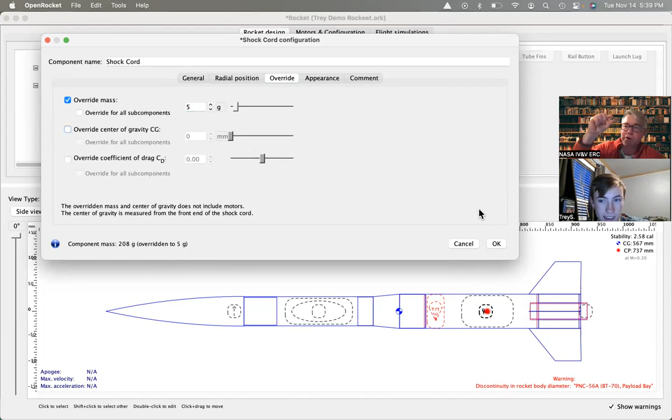It doesn't work. And I spend all my time clicking on every part and reading the mass until I find the part where they said their body tube was solid paper. In other words, it wasn't hollow. It wasn't like a 1 millimeter thick wall. It was literally a solid chunk of paper, basically like wood, like a log. And I'm like, yeah, that's the problem. So we have a shock cord. We're getting really close now. Man, I can almost taste it.

So we're going to now go to motors and configuration. We have 3 tubes that could accept an engine. Only one of them is my 29mm engine mount, though, so that's the one I'm going to choose. I click on it here. Is that where I click on it? New configuration. We're going to use a motor. Hide motors which are not in production. Okay, I'm going to have to get rid of that. Okay, we're not selecting from here.

We're probably going to end up not even using Estes. We're going to use Aerotech. So there it is, Aerotech. We can sort by diameter, which is how they're sorted. So we're looking for 29mm. Here's where they start. Here's an E, here's an E, here's an F. I have a whole bunch of F20s. It's a cheap engine. It's available. You can buy it. That right now is the name of the game because there's so few engines available. I also have some F50s, but I think F20.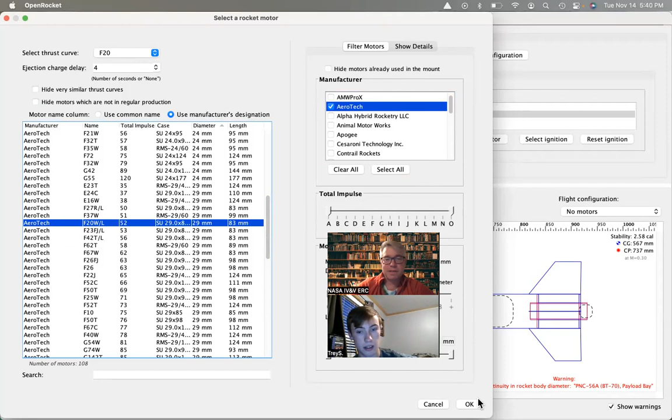The F20 is what I put in ours. I didn't see your engine. That was another thing. When you saved it, you did not save your simulations, so I didn't get any of that information. So an F20-4 is a great engine. It's available. It's nice for us. So we're going to choose that. So I chose an F20-4 in my configuration.

I'm going to go to flight simulations now, and we're going to wrap this up pretty quick. I'm 10 minutes over where I wanted to be. I'm going to edit the simulation. And in the simulation, I need to start putting some real data in here. I'm launching in Fairmont, right? Well, where's Fairmont? I've already had this pulled up, but I'll just do it again anyhow.

So the latitude of Fairmont is 39.4851 degrees north of the equator. And our longitude is 80.1426 west, or -80 if we're not using east and west.

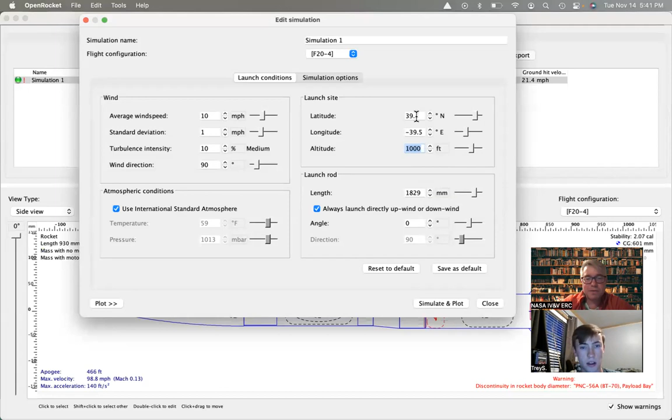And actually, this has the information from my previous one. I said this earlier. The altitude at our actual launch site is like 954, so I said 1,000. But we're not at 0. The default settings that come in here are not right. So my point is, you can get this as accurate as you want. We can also go and search the wind in Fairmont, West Virginia, so I could find out.

Right now we have, whoa, wow! We should go launch right now. Oh, it's dark. It's black. It's dark.

But what I'm getting at is, in the simulation, I threw 10 mile an hour winds in here. We could say there's 7 mile an hour winds, whatever you want to do, but you should be getting the weather. This is the Fairmont. Actually, it's the, no, I'll just call it the Fairmont.

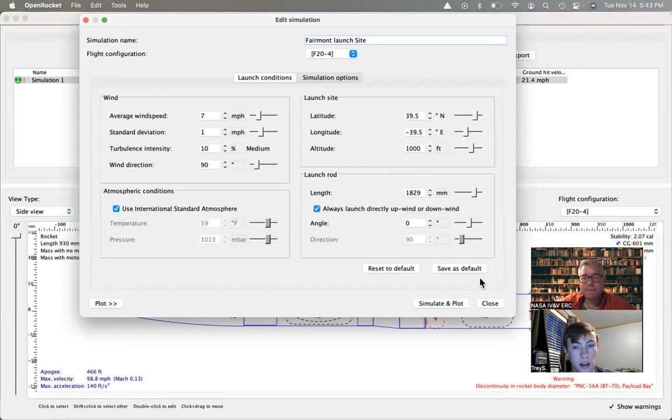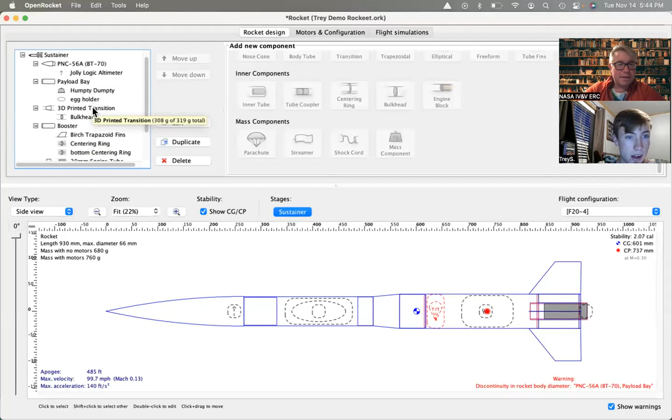Yeah. So here's where we're at right here with this rocket: it's saying that it's not quite up there. So I think there's some errors in our design, but what we can do is we can definitely tweak this thing. I do think that the 3D printed transition is not 300 grams. I don't, anyway, it's 300 grams. I think that we're gonna have to override the mass.

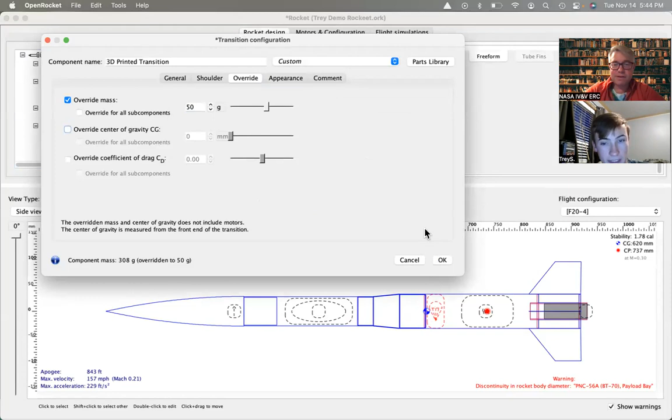And we're gonna say that this thing is, I don't think it weighs any more than the egg weighs. Yeah, that's probably less. I'm gonna really call it 50. 50 grams. Okay, that's gonna change our center of gravity and the amount of mass in our rocket. Also our fins, and our rocket's much bigger than it has to be, right? Right. It's 930 and it has to be 650.

What's a recommended height, or like length of rocket? There's no recommended length. Okay. My son, when he was like 7 years old, said, I want to build a rocket as tall as my dad. And I'm a whole 5 foot 5 inches. So, but we built a rocket actually taller than his dad.

But let's go ahead into our payload bay and let's shrink that sucker down a little bit. It's because this entire bulkhead slash transition piece is all hollow. Right. So we have all this space to store our egg. So let's go ahead and slide this thing down. As long as it was what, it had to be what, 160? 6 inches.

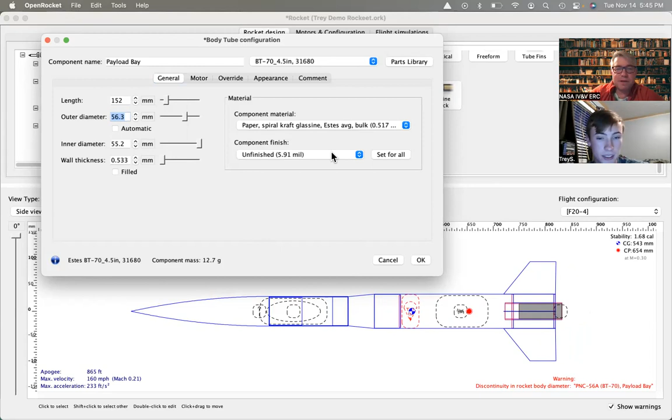Yeah, you're about there. So let's just say 6 inches. And in millimeters, that comes out to 152. So I made that small, but don't worry, we'll fix this. We'll fix everything else in here. We're gonna go ahead and take Humpty Dumpty, and we're going to put Humpty Dumpty...

Let's just consider that again, everything in this whole transition is hollow, right? Right. So we're gonna center Humpty Dumpty in the middle of the transition and between the top of the nose cone. Okay, I know Humpty Dumpty's weight is correct. And the egg holder, we'll just put that around our egg. So now it actually looks cool. Do a quick save. I was going to gratify myself by looking at it in 3D. Yeah, it looks cool.

Let's run the simulation again. So I go to simulations, I click on the simulation if it's not clicked, and I run it. We've now had 860. And I think the problem really was that one part was just whacked out. It was inaccurately massed for some reason. I think I may have an error in it. Like I can go back and look if I chose something solid or something. I'm not quite sure. It's very common to make a typo.

But I now have a rocket that's legit. Okay. It's got all the parts I need in it, and it is flying to approximately the right height. With slightly more wind, it's not going to go as high because it's going to spend more time flying diagonal. When a wind hits your rocket, it flies diagonal.

Now let's look at our stability, 1.68. Do you remember from our prior lecture what I said would be an ideal stability? Between 1 and 2. Wow, pretty good, huh? It's almost like I made this before. So I have a lot of strategies for slowing your rocket down. How was the flight duration now? 42 seconds. Oh my gosh, this is a perfect rocket.

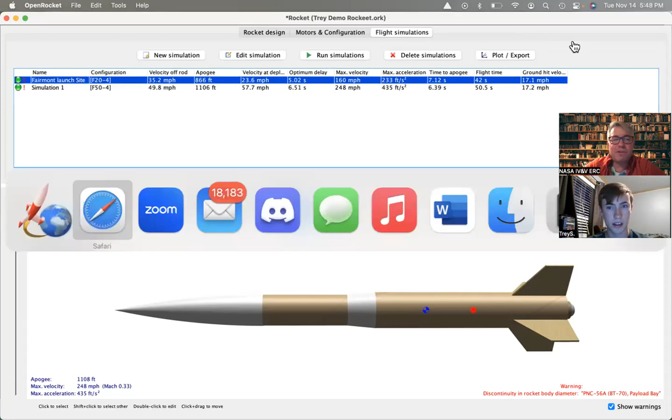But what I end up doing is I end up going to stores and seeing what I can buy. So if I look in here and I say, let's go shop, we're gonna try and buy some rocket motors. We're gonna buy single-use Aerotechs, 18, 29 millimeter motors right here. So here's an F10-4. A long burn motor for small light rockets, not us. F10, no E. I think we want to stick in the Fs. I don't think we want to go in E's.

I would stay away from the kits. Aerotech kits are confusing to me. And they require more hazmat shipping. Here's an E24. Nah, let's see. E. Here's an F15. Here's the F24-W, F24-7. I don't think we want to use a 7 because we would be pulling our parachute out on our way back down again. Here's an F23FJ-4.

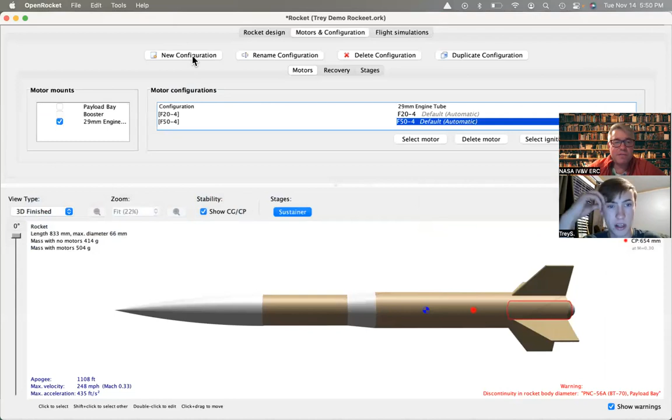So let's go under our motors configurations. We'll add a new configuration. We'll add an Aerotech F23, with a 4-second ejection delay. So you can see if it's a different engine, you just choose the ejection delay up here. Okay, go to flight simulations. Let's run that one. 868. So you can see I'm getting some ideas of how these different configurations are going to work for us.

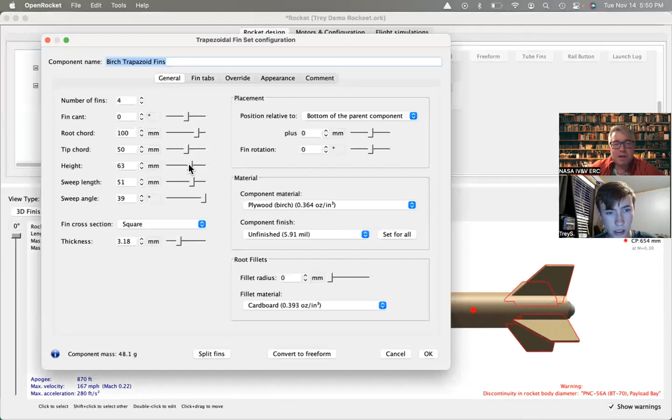If I want to make it go a little bit lower, it'd be really easy. All I do is go into our fins, for example. So I have some trapezoidal fins, and I just make them a little bit longer. When I do that, let's see here. If we look from the back, this is hard to see. So they look pretty long now, don't they? I'm not sure how high they were before. So we'll call them 65. They're big fins. No, they don't look disproportionately large.

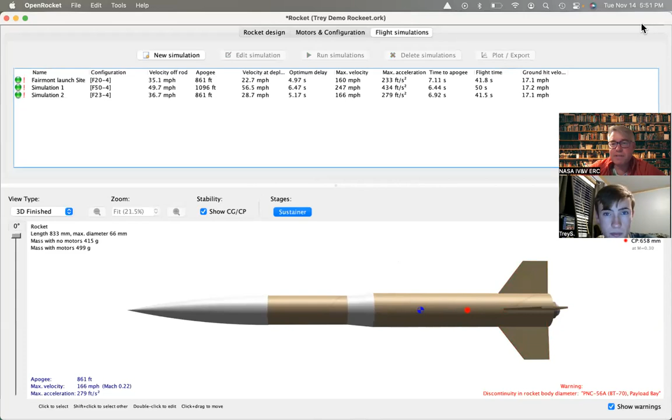Okay, and we go to flight simulations. Now they're all red because they need to be run again. So run the simulations. And wow, did I get worse? It's higher. No, it got a little bit better. Anyway, we can easily add mass to it. So I would add mass in a way that does not wreck our relationship between center of gravity and center of pressure. And so I might go into rocket design, and I typically add some mass in the bottom of my booster area. That's a nice place to add some mass. So like down in here.

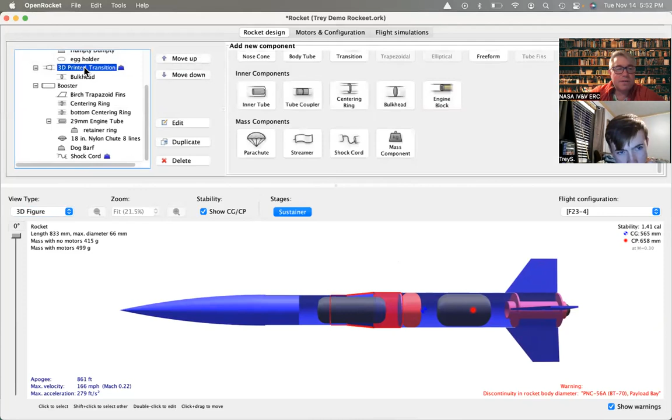And so I can just say transition, mass object, some clay, and let's add, I don't know, 30 grams of clay. Where? From the bottom of the part. I find this addictive, by the way. I get totally addicted to playing with this, and all I want to do is just keep doing that. I'm going to spread that clay out. It's not going to be very long, though. It's pretty thin. Just a bunch of clay down there. Okay, and I give it 30 grams. Okay, good. Flight simulations, run simulations.

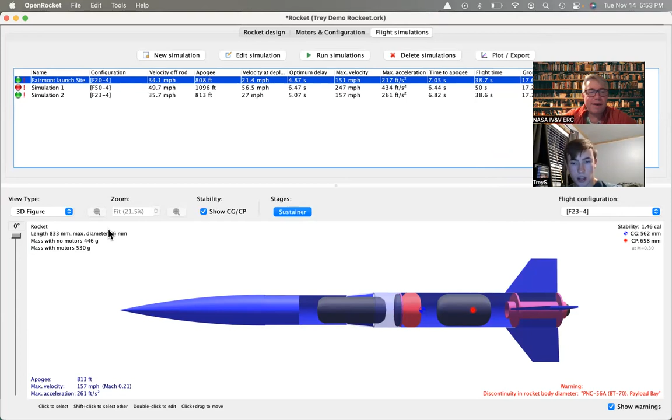So now we're 808 feet. My concern, though, is how long till I'm coming back down. Flight time 38 seconds. I'm not wildly off. I can increase the size of my parachute or something like that. So these are ways for you to play with it. Change parachutes out. But you now have essentially a rocket with a 1.4 stability constant. It's got all the parts you need in it, and this would be a good model for you to move forward. Okay. Any questions? No, I don't think so.

All right. So you were saying on Onshape, to make a nose cone, you just got to use the revolve. Yeah. So why don't I go ahead? I'm going to stop this recording.